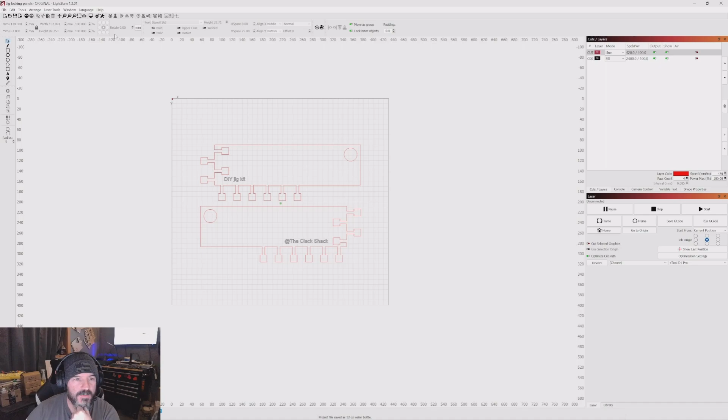So now whatever you stick on the puzzle pieces here for the front for your jig, that's going to be square with the laser. So this is a really cool system. He explains it more in his website, but yeah, so there's the jig panels.

Here's the actual different panels that you can make. Right now I'm doing the large jig board. The extra large jig board won't fit, I don't have a piece of wood that big, plus it's too big of a workspace for the thing. That might work if you have the extension on your laser.

Even this large jig board was too long, so I had to open that up in Inkscape and break the path on the bottom, cut that out. So now I basically took this line out here and took it out. So mine's just going up, over, down, up, over, down like that and cutting. It's not cutting its bottom line because my workspace actually stops right about here where this blue line is. So I don't even need the bottom piece. I don't care because there's nothing to cut out, so it doesn't matter.

So what we're going to do, I'll explain it when we get over there, but when this piece of wood gets cut, it sticks into the back piece like a puzzle. So we've got the jig, this piece of wood. Here's how you make a custom jig: you just take this blank piece, and whatever you cut out while it's affixed to the back piece that's in place, you can use absolute coordinates over here, and it will automatically go to where that is on the laser.

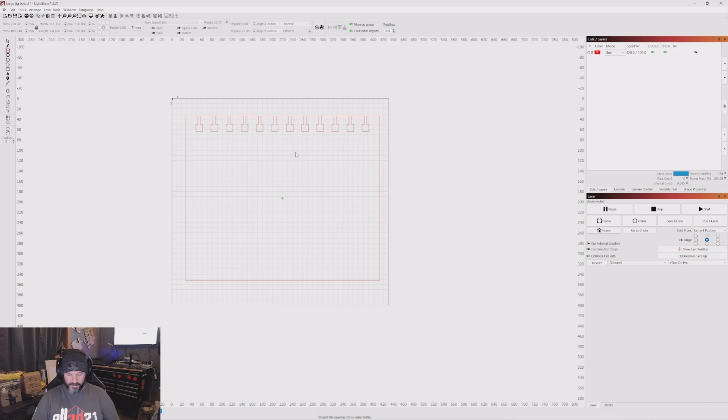So we are 95, 96, 97, 98. I'm going to cut my holes at 99. I'll give a millimeter of breathing room, because I found that if I cut it exactly to this size, it doesn't always work right, and when you stick it in you have to force it in. So I'll give it a little bit of play, just a millimeter though, not much. So what I said, 99, right?

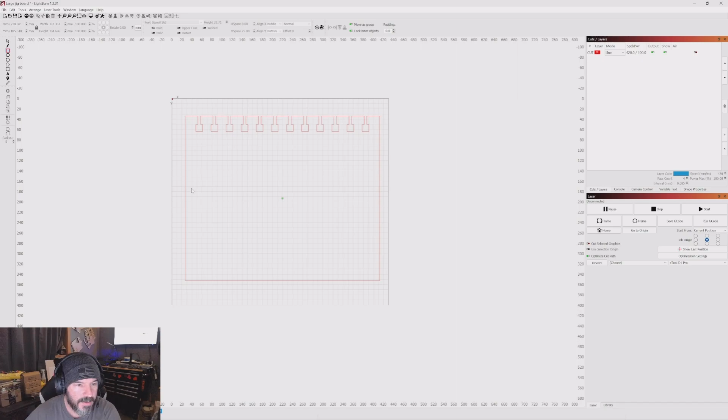So we're going to make a square, and I'm going to use the blue T2. The laser will not cut T1 and T2, those are tool lines. As you see up here it says tool, it'll frame them so you can see them, but notice up here there's no output, so it's not going to cut them. Let's see, we got this, we're going to... look at that, I drew a perfect square.

Isn't that cool? Well, we don't want it 100, we want it 99. All right, oh I'm a dumbass, that's the percentage, I didn't draw a perfect square. All right, 99 and 99, so there's our perfect square, that is 99 each. We're going to duplicate that.

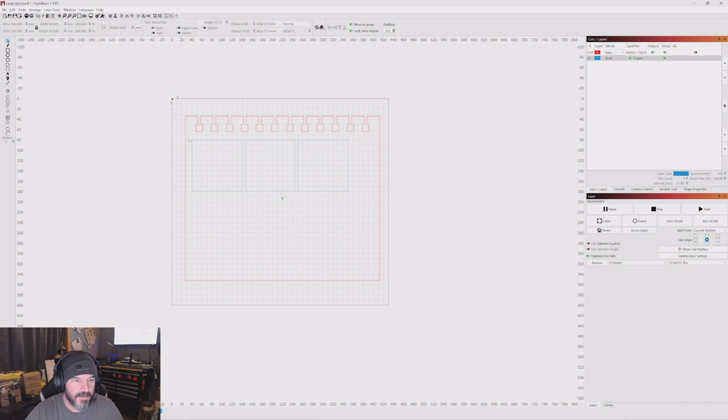Control D, move it over. Yeah, I could use the array function, but why, this is just as quick. So there we go. Now we've got some room here, right? Looks like we're going to fit 6 on here easily.

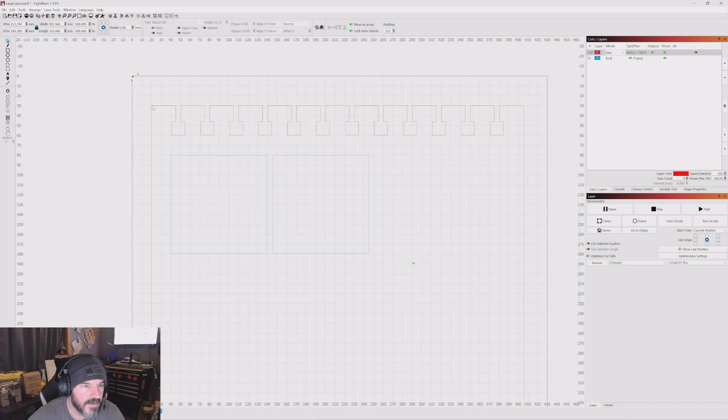So let's get that out of the way. Let's put this, this doesn't matter, you don't have to put things in line with these squares. I just do it for measuring purposes right now, because once you cut the piece it's a freestanding piece anyway, so it's irrelevant. But, where do I want to do this? Let's put this one.

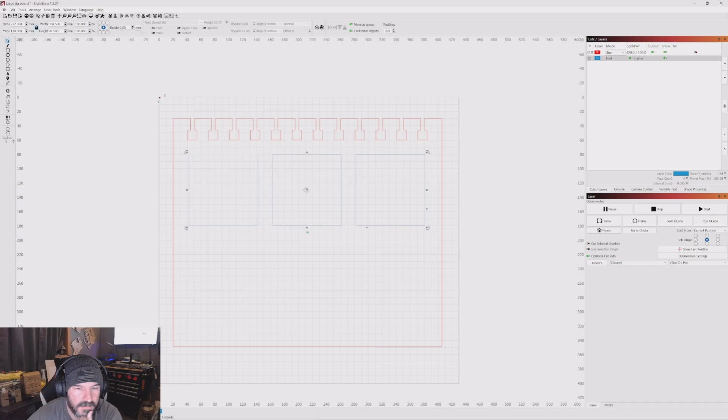Let's go over 2, and then go over 2. That leaves us 20 millimeters there and a little bit there. So we can actually move it over just a hair. Actually, I'm being retarded, I can also just group them with Control G, highlight all of them, and go up here and vertically center. There, now it's centered.

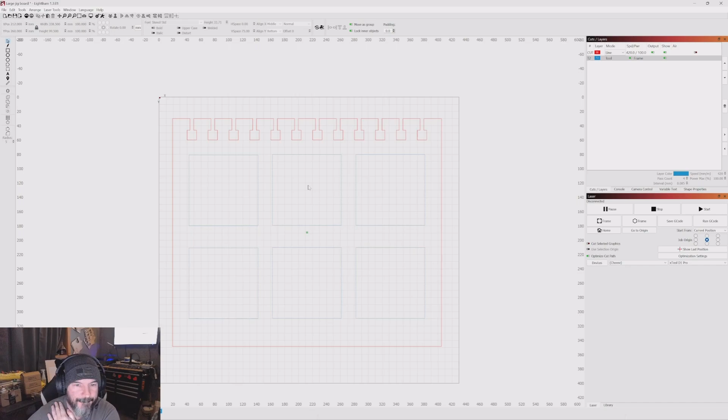Duplicate that, bring that down to the bottom, and there we go. Now we've got our 6-piece cutout. Cool.

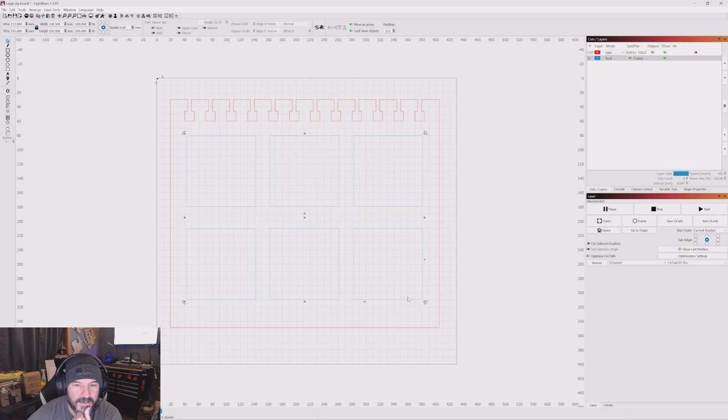All right, well we need to turn those back to cut line. And I've got 1/4 inch birch in there, so we're going to go 300 speed, 100 power, 4 passes. That should do it, we'll see. We're going to turn this back into a tool line because we're cutting that out right now.

And yeah, this next part I've got to do over at the machine, because... actually I don't need the tool line at all. I just remembered that, let me take that out.

So what we're going to do, let me group these. All right, so what we're going to do is push these up somewhere, we don't know where yet, down here. We're going to put these somewhere and then frame it and make sure it's within the board once we push the pieces in place. Then it will be locked in and we can use the absolute zero coordinates, which change it over here, absolute coordinates right there. You notice it puts your little green dot back at home up there.

So I've noticed on my machine, if I start more than 20, here's 20 millimeters, if I go less over here and start at 10, I'll get the alarm. It'll hit the side of the machine. So the workspace on these machines, they kind of lie to us a little bit.

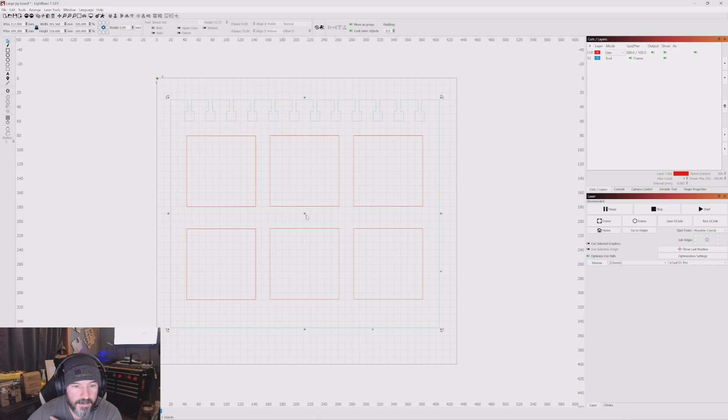Okay guys, here's take number 3 or 4 or something, I don't know. My audio cut out on me earlier in the middle of the video, so then I tried to do an overlay and I didn't have the mic turned on. So yeah, this has just been one of those days.

So real quick, we're just going to go over this—the part that cut out, I was talking about when I was creating the cutouts for the jig.

Jesus Christ, that's bright. Holy fuck. Why can't anything work right today? Let's see—settings, properties, configure video, exposure—get rid of the low light. There.

Okay, now that we're done blinding ourselves. So what I was talking about in the one spot in the video was about the cutouts—placing the pieces of the cutouts for the coasters in a certain spot, moving it up and down, getting it just right. I think there's enough redundancy in the whole video about that, so I don't think I need to bring that up again.

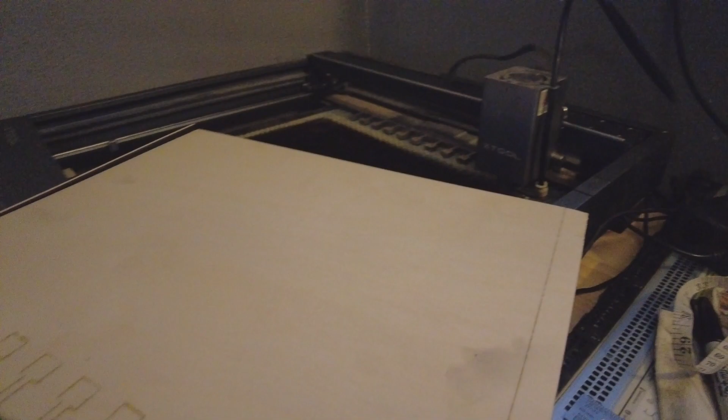I don't know if you can see, but we've got a few spots here. We're going to have to hit it with the knife. Especially down here, there were some glue pockets down there. The rest of it came out pretty good. I mean, it's almost loose. Honestly, I could probably... yeah, most of these I can poke right out with my hand.

So we got very minimal cutting to do. All these are loose, very minimal cleanup. I think, honestly, the only piece I'll have to score looks like maybe right here. Can't seem to get that to poke through one-handed anyway. Maybe if I put you guys down, I can do it.

Got that one. But this over here looks to be pretty... oh, got it. We ain't got to be pretty. I don't care if it rips some of these little fibers off, because this is just a jig anyway. Alright, well, let me put y'all down and go ahead and pop the rest of this out. Maybe.

Alright, let me score that piece real quick. As long as you come most of the way through, you don't really have to cut at it too hard. Just give it a little score and it'll come right out. It's just a couple little strands, little fibers holding it in.

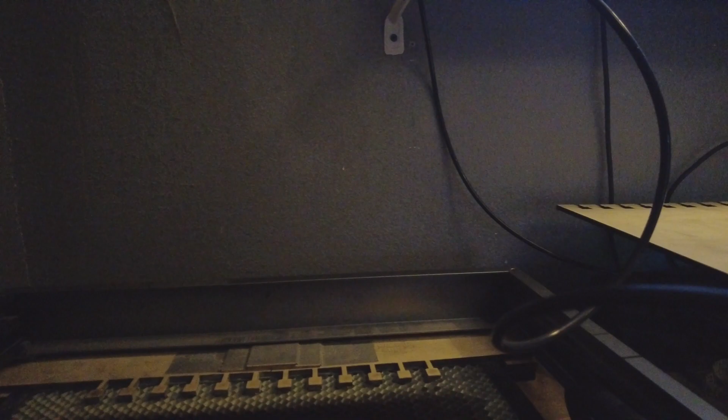Get up there. Little bendable tripod is not cooperating.

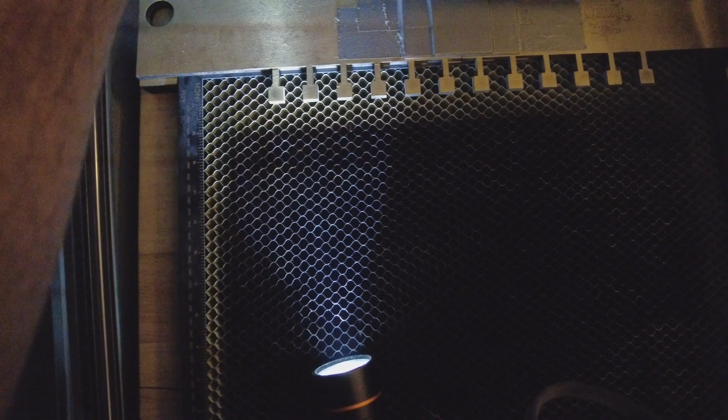Alright, so there's the back, and you'll see I've got that back piece already in place. If I lift up on my frame, you're gonna see—hold on a minute. If I lift up on the back piece, you're gonna see the holes where the legs go in, right? So the legs rest right inside there, on top of those little honeycomb adapters I was talking about.

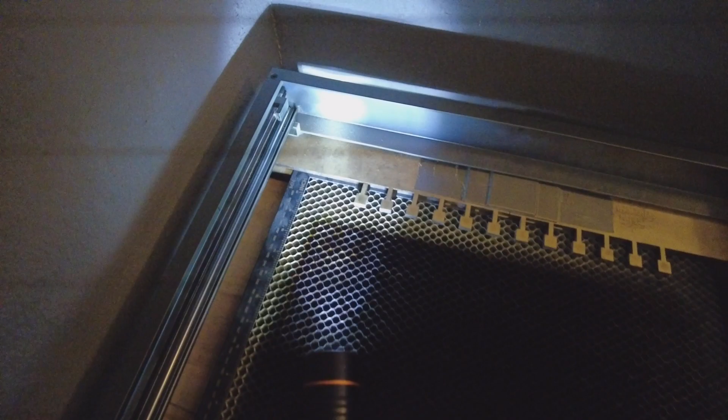And this stupid thing ain't... What are you trying to track on? Dumbass camera. Alright, so we've got the holes back there. They sit in there. This piece stays.

This light's a piece of shit. Put that over there. Bring out this LED light, see if this is a little better for what we're doing here.

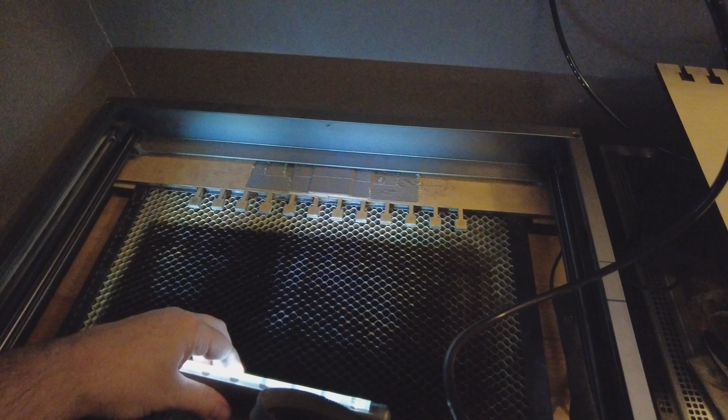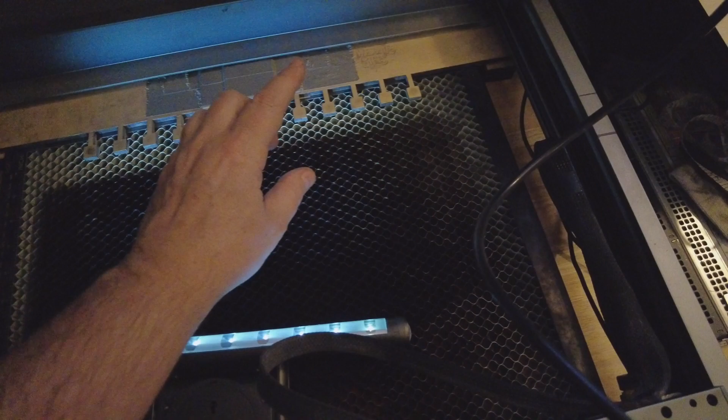Okay, so this piece, it's got a little bit of play in it, right? Up and down, but no play left and right. There is, I'm not gonna lie, about a half or a quarter of a millimeter of play in it, because when I sanded the inside of the circles for the legs, I went a little too much. But it doesn't really affect anything—there's just a little bit of play back and forth because of my sanding job.

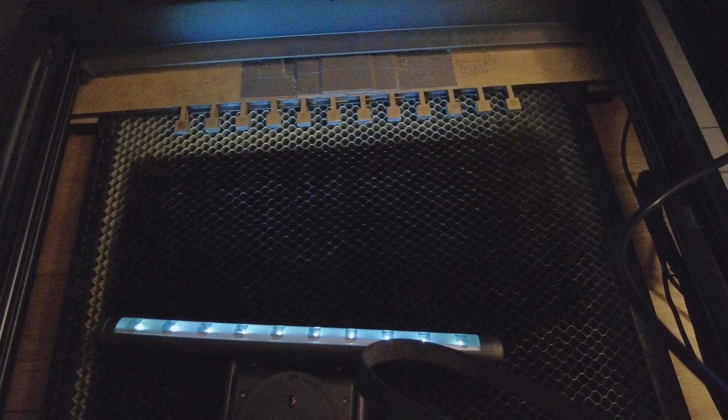So I've got someone in the group that's going to try to make us a metal one of those back plates. That'll be great whenever that happens.

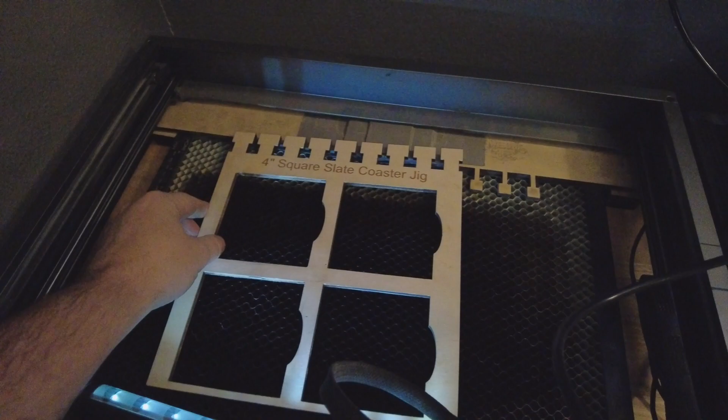So whatever jigs you use, you see I've got a bunch up here on the wall. They all have the little puzzle pieces at the top. So if I were doing this one, this is for slate, and I just stick them right in there, and it fits right in. Then I tell the machine to go home, back in that corner. I hit start, it comes right out to here. So it's pretty cool.

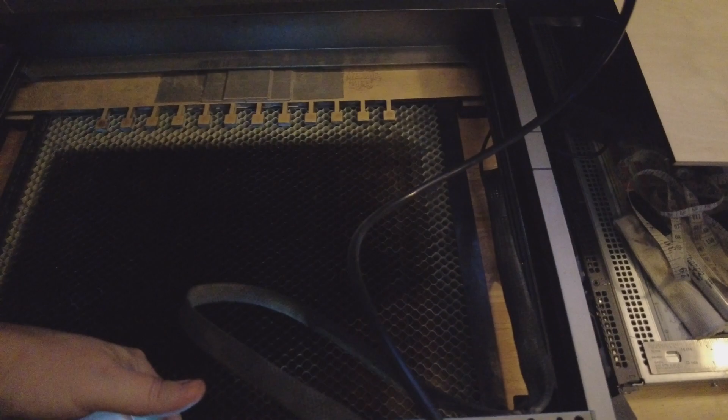But I made that one the same way I'm making this one, so let's get started on that. We take this big old piece of board that we just done, and let's see how tight she's gonna be. Hey, it's not really that bad, it started to go in. She's a little tight—let me put you down.

Like I said, these first few times you put these in and out, you're gonna have to work with it a little bit because it's pretty tight.

All right, we need some sanding done on that, looks like. Cool. All right, I'm gonna press pause, go over those a little more with some sandpaper so we don't bore you to death, and then we'll come back with that.

Okay everybody, we're back. I ended up just tearing off little bits of 600 grit paper and hitting it to get the char off. It took a lot to get it on there, and then I held it up to the little one I made earlier to see, and it looks like somewhere in the process of exporting it to Inkscape and back into Lightburn, when I took off that bottom piece I was telling you about, it must have shrunk up like 0.5 millimeter because the little pieces right here are just a little bit short.

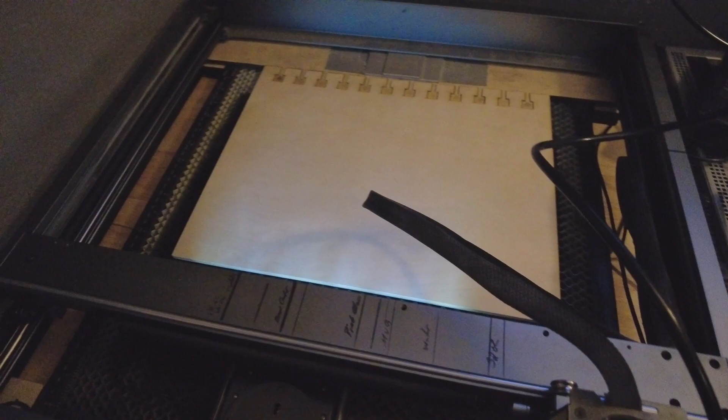So now we're gonna go over here and hit the home button. Oh, my light's in the way, I'll just push it with my hand. There we go. Now we'll hit the home button so I don't run into my light. So the laser went back home. It's in the back space, right?

So now we go up here and we open up that file that I made earlier. Jigs, there you are. Okay, so we don't need the blue part anymore, let me get rid of that. But this is our layout and this is what we want.

So if I move this all the way up here, remember I told you earlier I can't go 20 or I'll set my alarm off. So we'll zoom in, we'll grab it here, and we'll drop it right there at 20, 0.

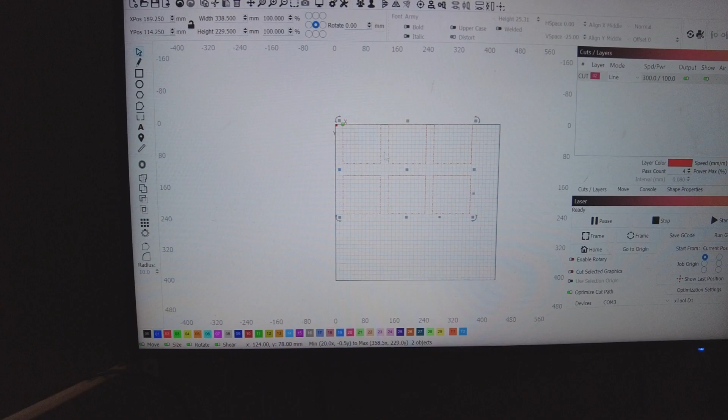And let's just do a frame. Actually, let's ungroup this. Control U to ungroup. And make sure this one's ungrouped. Control U. What I want to do, I don't want to frame the whole thing yet.

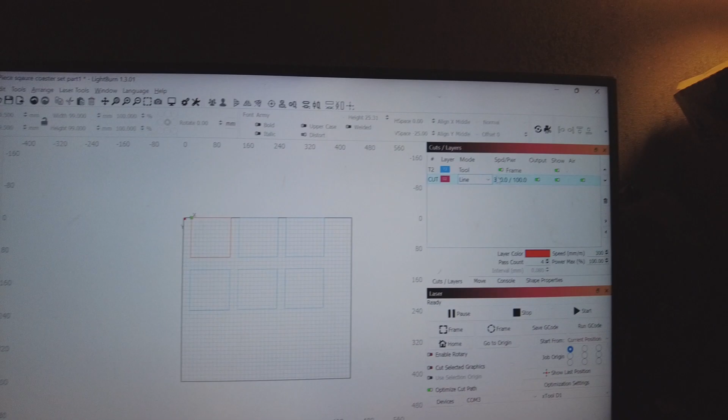Stupid camera, stay up there. I don't want to frame the whole thing yet just because I don't want to sit here all day doing that, so we'll just make those a frame. We'll turn this one back to red, and up here we turn off the frame button for the blue. So now when I hit frame, it's only going to go around the red one.

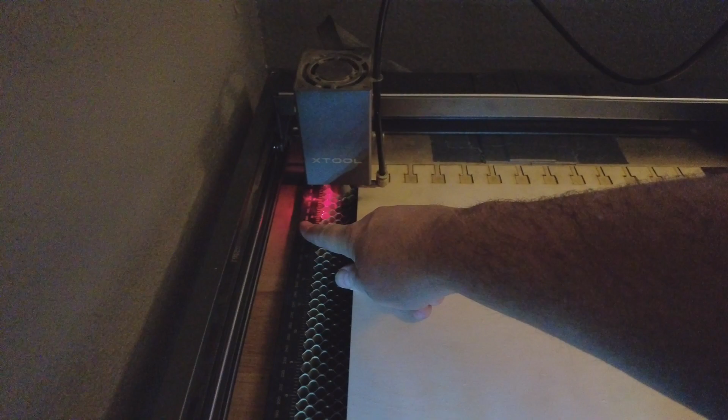And basically what I want to do when I frame it, I want to see where it puts it on the board. Alright, and way off, right? But that's about right, because remember I told you 20 is my limit before it starts to bang into the rails, so I know that. So now we know that's over.

We'll get our little slide rule and measure from crosshairs over. It's about, can't see, 35. And we know we want to come in about, what, I'd say 10, 20. So let's just go at 55 for now and see if my quick math is right.

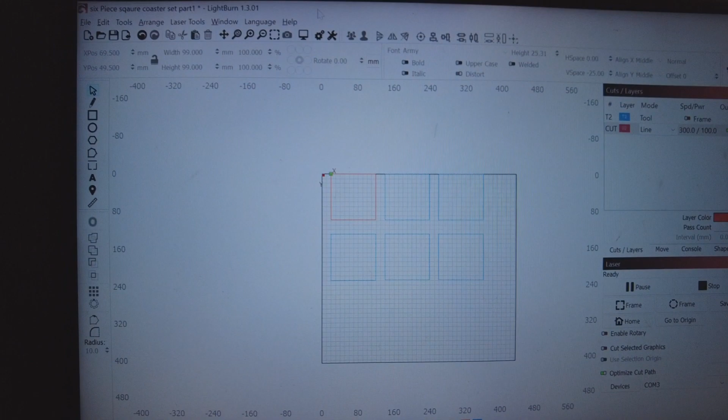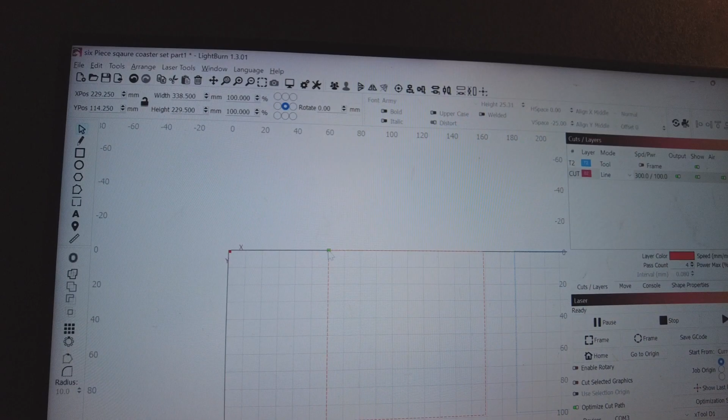So we highlight them all and move them over to about 55 from the 20, so 75 total. So 10, 20, 30, 40, 50, 60, 75-ish. That seems a bit far. I bet I can get away with right here. Let's go right here. Let's see what that does.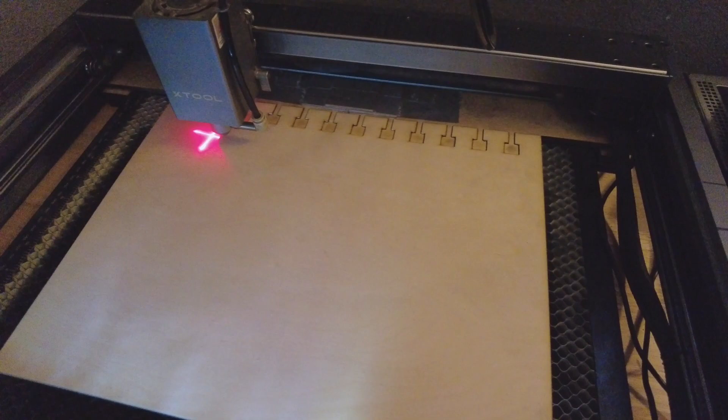I'm stupid, I didn't change this over here from current position to absolute coordinates. So now we do that, hit home, tell it it's home. Now we hit frame, and we see it goes right there. Alright, that looked about right.

So let's see how far over we're going to be. About 25, so I can go back 5. I thought that looked a little far. I did my quick math too far ahead.

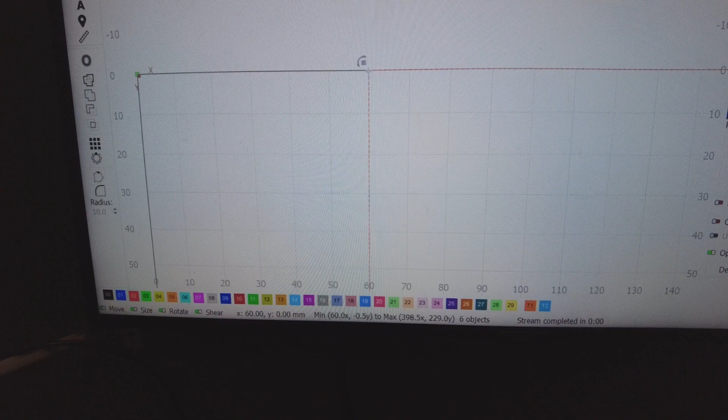Yep, I like that, I like that position. So that makes me happy.

Now we know that's 0,0, and also at the very top, right? Now sometimes this back cable can get in the way, so I don't want it that close to the top. So I'm not sure how far down we can come yet.

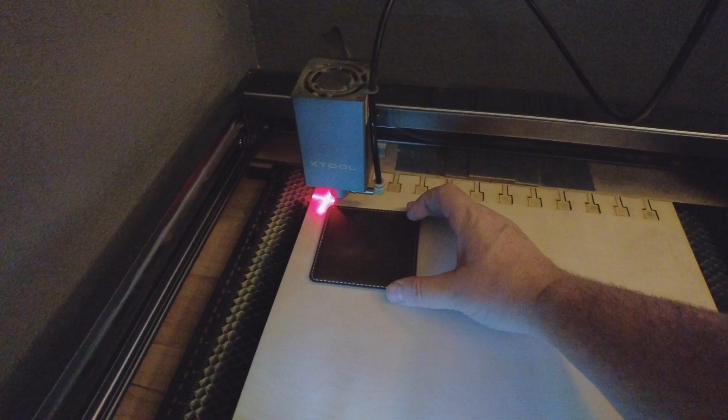Just to get a rough idea, we can throw a coaster down. See, there's 1, 2. So we got about 20, 30 millimeters to play with.

So I'm going to bring the whole thing down, to about, we'll do 30. See how that looks. And actually, I'll go ahead and close the gap here just to make sure we have enough room.

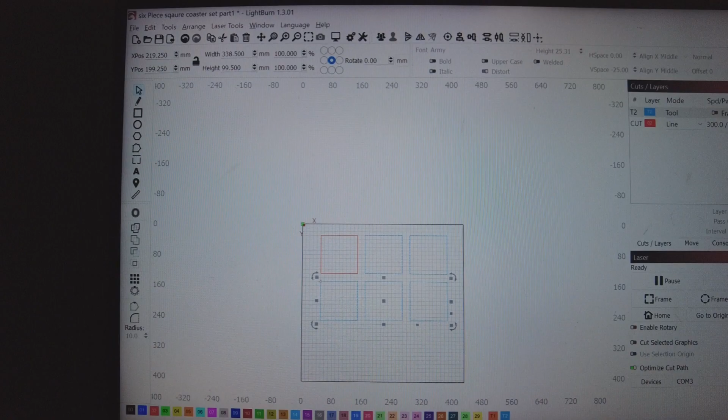We'll put it 20 away from it. Right there. Okay, so I'm kind of liking the way this is shaping up. We'll turn them all back to red.

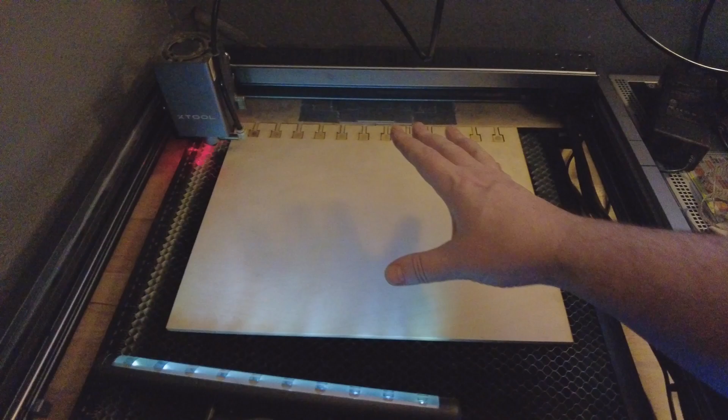And we'll tell it to go home. Always hit home and then start again. Sometimes I've noticed, now it's supposed to, if it's out here and you do something, it's supposed to go right to it. Every now and then it gets stupid and forgets, I think, or I don't know what it is. Or maybe I do something wrong, I just don't know it.

So now I've just gotten the habit of always hitting home when I'm using absolute coordinates. So we'll frame the whole job. We'll see it's going to start up there. That's cool, gives me some room. I can write something up here.

And we're probably going to go to about here. Yep, probably going to come down to about here. Oh, look at that, we're right on the bottom.

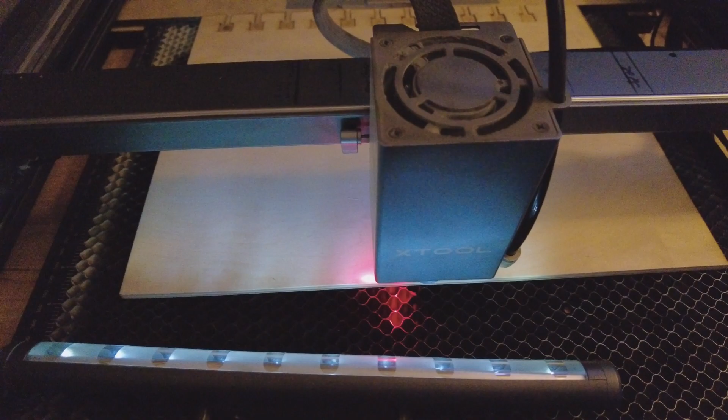My sheet of plywood that I chose doesn't cover the full workspace. So we need to go up a little bit.

I kind of want to keep this gap here, I don't have a whole lot of room to work with. Screw it, we'll just make them 10 millimeters apart. That's fine, so that'll buy us 10 millimeters, and do this.

We'll go up. Now again, remember guys, this is also one of those things that you only have to do once. So take your time, even though it's a little annoying, a little time consuming. Take your time, get it set up exactly like you want it, because once this is done, anytime I want to do these kinds of coasters again, it's already set.

I just plop that thing down and pop the coasters in and go. So, alright, let's go home and let's frame that again. See how far on the bottom we come this time.

Oh yeah, we got lots of room now. We made a lot of room. So I'm happy. I just don't like my stuff all the way on the edge and the bottom if it doesn't have to be.

I can actually bring that back down 5 millimeters. I think I might do that because that was kind of a lot of room. I just don't like the inside pieces being so close in case I break it one day. I mean, it's plywood, it shouldn't break, but again, it's one of those things, personal preference. I just like it to be a little bit spaced out.

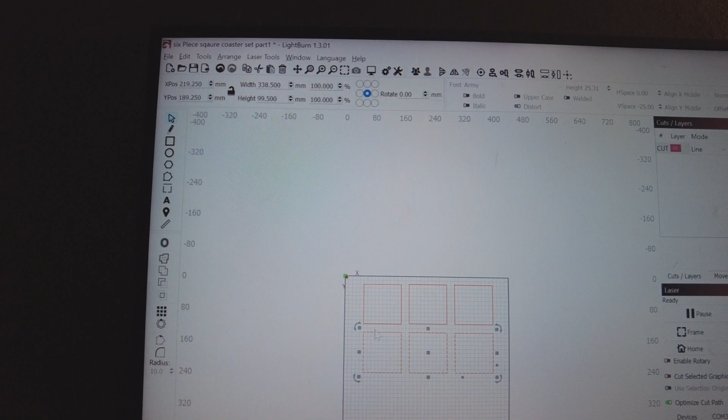So let's go ahead, and I need a camera that attaches to my head. Then I don't have to hold this hand. At least it's got a gimbal on it, so it's nice and steady for you guys.

Okay, so there's those pieces.

I don't think y'all want to watch it cut, do you? I mean, I could leave the camera on and do the time-lapse nonsense, but engraving's funner to watch time-lapse, not really cutting.

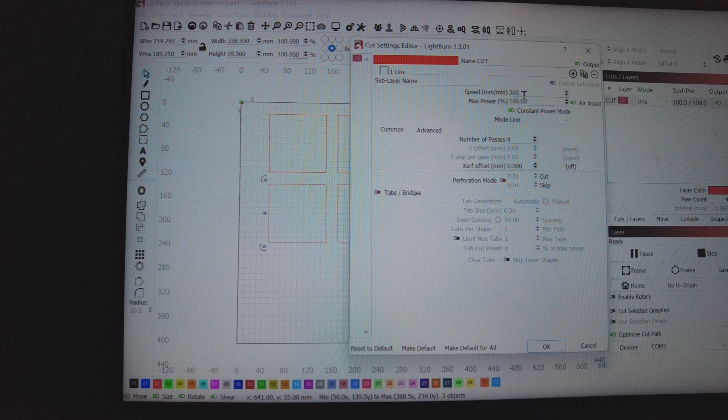So what I'm going to do now, the other one I did at 300 at 4, it left a little bit of scraggles. So I'm going to do this at 275 at 100 power, 4 passes. And we'll see, those should pop right out at that speed and power. It's going to take about 34 minutes, so I'm not going to leave this thing running. I'll go charge it while we're waiting.

So what we're going to do, now we're going to cut these. And then once we cut them, we're going to turn them back into tool lines, and we're going to lock them in place. And I'll show you that, and then I'll explain to you why, because that's when, right now it's our cut file, right?

As soon as we're done, because of the relationship between this absolute zero coordinates and the way the template's stuck on the back piece, it's all going to equal itself. So when these holes are here, as long as we save this file and lock those in place, next time all we have to do is drag our images inside these squares, and boom, we have a template.

So I'm gonna go ahead and get this started. Let me turn my air on, and we are going to cut. There it goes. So I'm gonna pause the video, and we will be back, and we'll have our pieces all cut out.

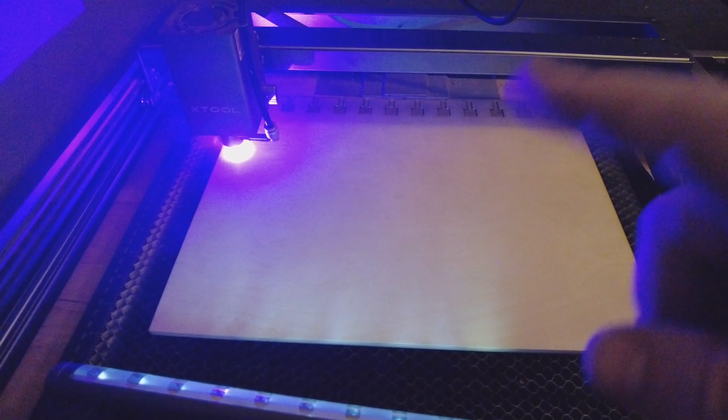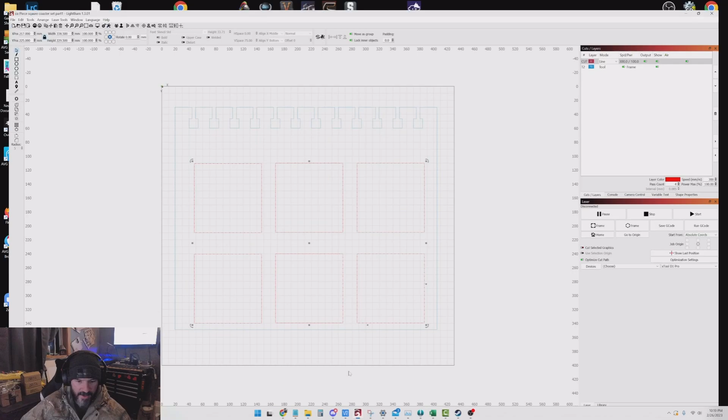All right boys and girls, I thought about it after I stopped the video over there. We can do this part on the computer to save a little bit of time while those are still cutting out the template for the jig. We can go ahead and set up our template. So let's reopen that file. And there's the one that I just had over on the other computer.

As you can see, there's our six lines. So the first thing we're going to do is turn those into tool lines, because we don't want to cut those anymore, right? So now they're tool lines, and nothing will happen with them, but they're still visible to us, so we can see where the squares are in relation to the board.

Now if we highlight all of them and go to Arrange, then Lock Selected Shapes, you'll notice little plus signs come in all the corners. Now if you click them, you can't do anything with them, you can't move them. So they're locked in place, and now we don't ever have to worry about dragging them out of alignment.

I don't know if I'm explaining this good or not, maybe I am and I'm just overthinking it. But since we start at 0,0, we utilize absolute coordinates. We hit home on the laser, and the laser always starts from here and goes over here to do whatever we drop inside there.

So let's put a picture in there. Oops, not that button. Yeah, I'm wearing my jacket because it's cold in here, I opened the window and it's like 15 degrees outside.

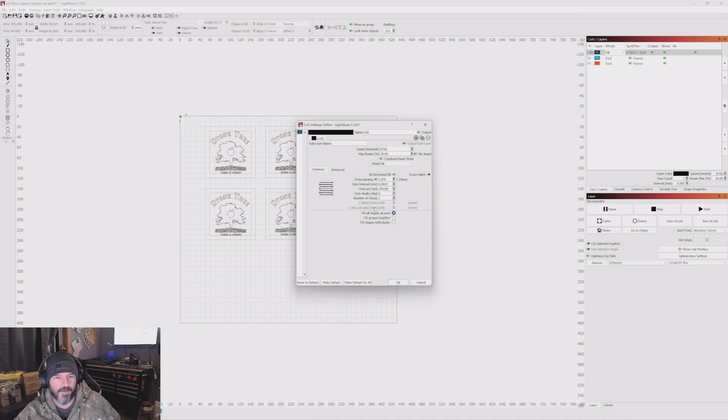But just go here, fill groups together, and that makes more logical sense—basically it does one at a time. And now if we go look, we see there's no dark red. The dark red was it overlapping itself, doing redundant work. The light pink is where it goes. In the first scenario, we had a lot of light pink in between, right? Because the laser was going over there. Now you only got it going over once—so it does all this, goes over, does all this, goes over there, right? And that's why it cuts off a lot of time, 15 minutes worth of unnecessary movement.

And this, again, is 8700 speed, so that's pretty fast—that's 145 for those of you that use millimeters a second. So that's pretty quick. I wonder, I probably could push it faster, but honestly, I think if you get going too fast, you might lose a little bit of the detail, so I don't want to mess with that.

But so I'm happy with this. This is what we're going to set, this is what we're going to do. Let me save this as the final version, and then we'll go over there and watch one.

We will do this as leatherette square coaster set—that'll be the name of that.

Now also what I'm going to do, just for the first one, I'm going to highlight these other 5 and give them a tool color for now so that it doesn't do them. I don't want to frame my tools, and I just want to do one. I want to do one, make sure it's going to work, make sure my jig is set up correctly and I didn't miss anything, because I'm not perfect. I screw things up. So I want to just make sure it works before I go run a whole job of 6 and possibly waste 6 coasters and ruin 45 minutes of my life.

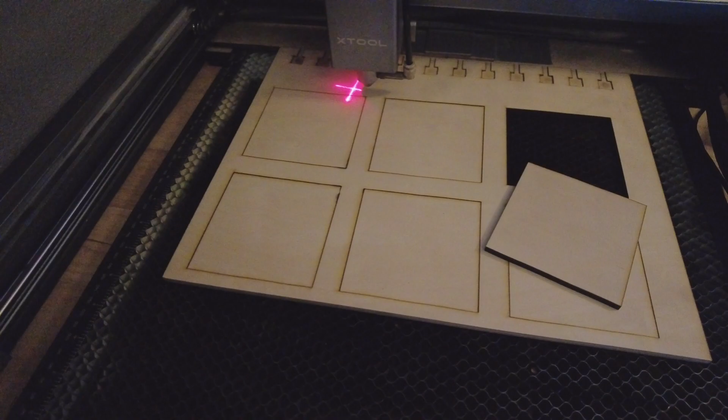I try not to sound like too much of an asshole when I talk about this stuff, but you see it all the time. If I flip this piece over, you're going to see a lot of lines didn't even go through, right? If I lift up a little bit here, this one's almost out. This one, a little bit there, it's stuck here. This one, a little bit over here, it's stuck in this corner. This one, stuck in this corner. And this one, stuck in this corner.

So if we look close, you can see some heavy burn marks here. That's telling me there's some real heavy glue deposits in this area right here. Same thing over here, there's some heavy glue here. When I run my hand under, I can feel a little bit of jagged there, so it went through, but over here there's nothing. It didn't even come through at all. So I'm not even going to waste time undoing it and flipping it over and trying to score it, because I know that's going to be a perfectly clean piece of plywood.

Now, the reason I show you guys this, look, this one came out perfect, right? Minimal charring here. Came out great, I didn't have to force that one out at all, it just came right out. So plywood is very inconsistent, especially when you're doing a big piece. This was more evident at Christmas time when we were all trying to do ornaments, right? One big sheet, let's make 20 ornaments. They don't come out. I can't tell you how many I've thrown away.

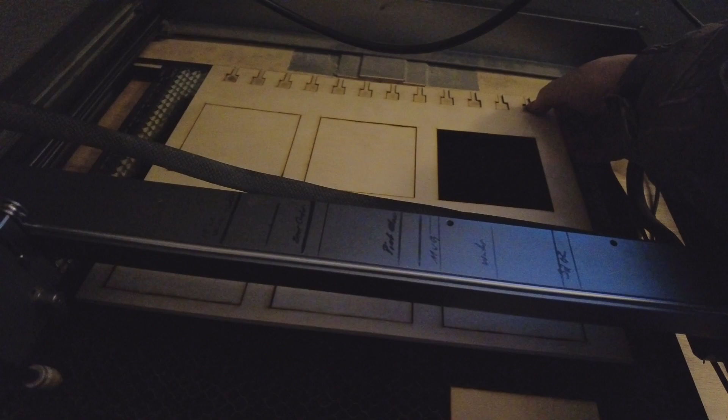Now she's still a little tight, so I'm going to bang them with the Sharpie edge here. There. Just to remind you, that is not normal, we don't normally have to do that. That's because I screwed up when I cut this big piece, and I didn't want to waste another piece of wood and cut a new big piece, but somehow I made these little deals shorter than they're supposed to be, so I got to get in there with a file and fix that up. But for now, we got it to work.

So if we look on the back, there's a big glue spot there, a little one there, a little one over here. So it's not as bad. This whole area kind of sucks, so we'll just hit that with the knife and get it out of there.

Did I tell you that I hate plywood? When I first started doing this, and this happened, I was trying to score a piece of wood out when I was out in the other room before I moved into this room, and I went down and cut my finger, big old gash right there, and it was a mess.

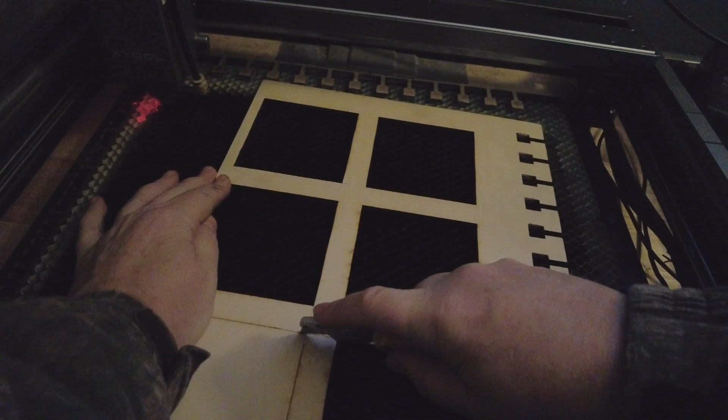And do be careful, I'm putting a lot of pressure on here, and that's why you notice I keep my hand out of the damn way. Because I already learned once, cutting the shit out of my finger, so I put a lot of pressure.

And you see there's one spot right here where it keeps popping out with this black soot. My knife keeps getting stuck in there. This is a DeWalt blade, these are nice, and this has actually got the extra heavy duty blades in there too. That's some strong gunk they put in this plywood.

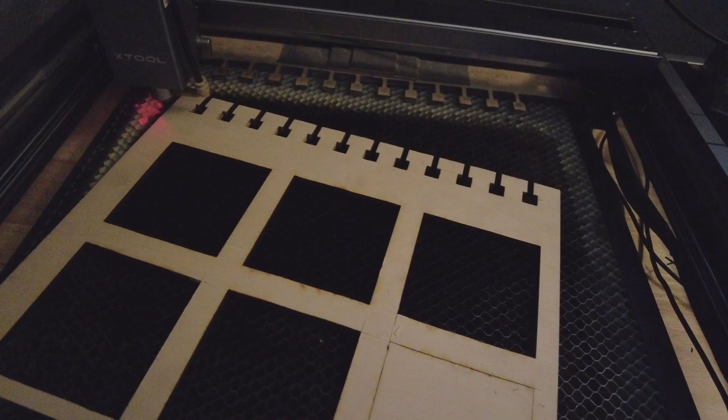Tell you what, and sometimes what happens is when the laser hits it, it don't burn it up, it just petrifies it. It makes it harder, and every time the laser goes over it, it just makes it harder and harder. Let me take off my jacket, it's warm now.

As soon as I shut my window, it gets warm quick in here. Alright, and we are free and clear. Now we got extra little pieces of wood to use as shims, right? We'll save those, we'll use them for something.

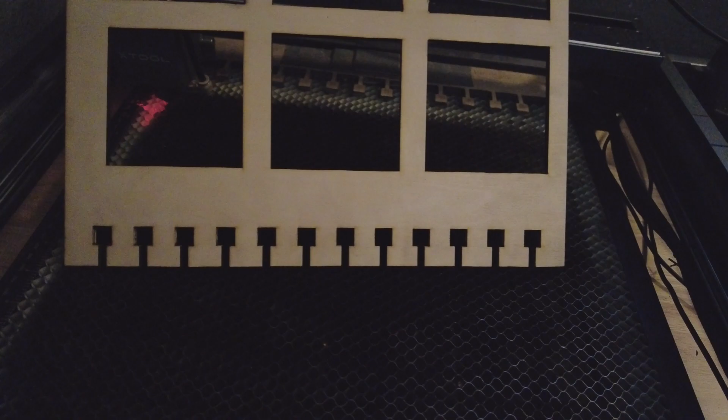And let's clean up this part. Like I said, luckily the cleanup part ain't too bad, and if you're doing a project and you need your pieces to look nice, then this can be also very frustrating, because now instead of having that nice clean black burn mark, you got really bright marks in between. So that can be sucky when you're trying to present something nice to your friends or family or customer or whatever.

Let's get some of these smoothed out here a little bit. I just want to make sure nothing's hanging for the coasters to get caught on.

Kind of running out of idle chit chat now. I think I've already displayed my anger for plywood enough, you probably don't want to hear that anymore. So we'll just finish this up.

I ain't doing 100 coasters one at a time, I'll tell you that. Alright, let's get this bad boy back in there.

Again, this is not normal. Don't sit there and go, that jig system sucks. It's a great system, all my other little pieces go in and out with ease. I just cut this one incorrectly, so it's my fault.

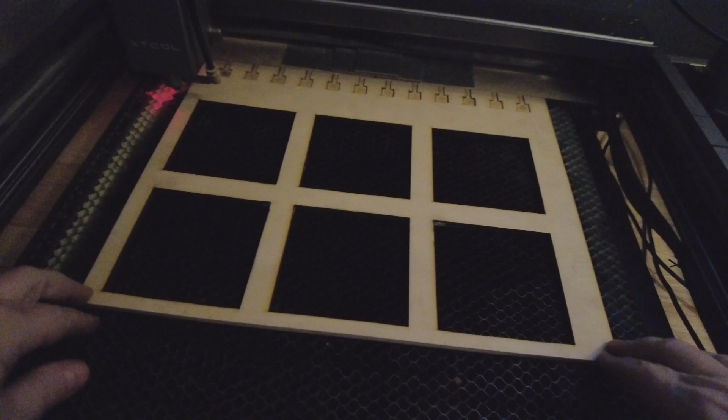Sometimes your pieces will lift up a little bit, they might warp in time. Wood warps, and you can see when I tap it, there's a little movement. So normally I'll just stick a magnet over there, hold it down. That one ain't really moving, but we just put a little magnet over there, hold her down. Doesn't matter on this because it's a jig, but there you go.

Hit home. Alright, let me take you back up here to the computer and turn the little deal. Wait, don't go that way.

Okay, so if you remember earlier, what I had done was I set all the other ones to tool lines, and I just want to do one coaster, right? So we want to try one out. Let's go ahead and plop one in here. I'm going to push it left and push it up. There really is no play in here. I just do this to make sure, that way everything is always the same. So it's in there pretty good, there's no real wiggle room at all.

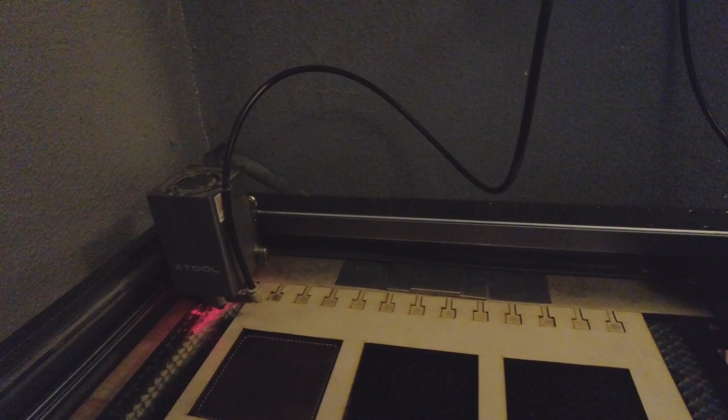So the next thing we need to do is get the focus. Put it right in the middle, drop her down, and we're good. Okay, and we hit the home button. And let me stick you guys back up here.

These little tripods with the movable legs are pretty cool. This camera likes to lock in on things, so it's not always straight, but whatever. Alright.

There's that, and did that clear okay? Sometimes this won't clear, and you might bang on it if it's too low. That's one of the bad things about using a 1/4 inch, but I think it cleared just fine. Let's just pull it here and make sure. Hit home. Yeah, we didn't bang on it.

Okay, cool. So we're going to turn on our air, and we're going to run this job. I'll leave this one running just for shits and giggles, and I'll practice with the fast forward on the editing when we edit the video later. But let's see how it does.

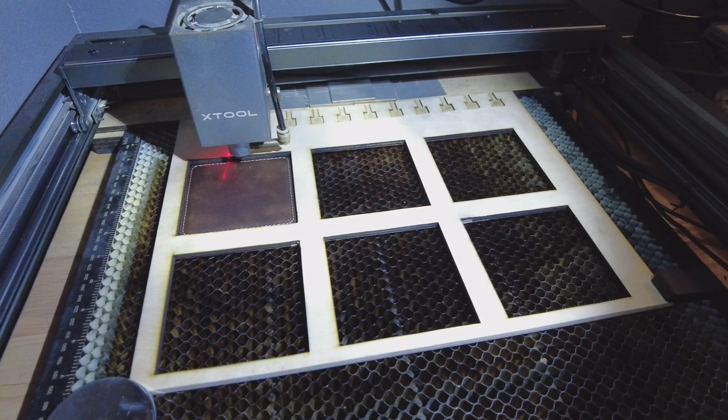Actually, I want to frame it first. About 5 millimeters away from the line on that side. Perfect, I like it. So, if you...

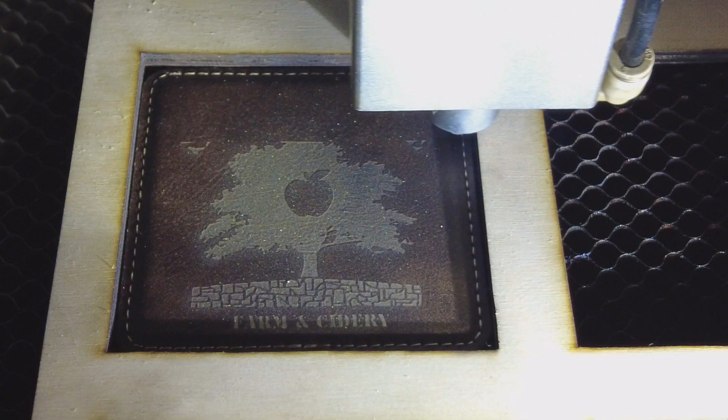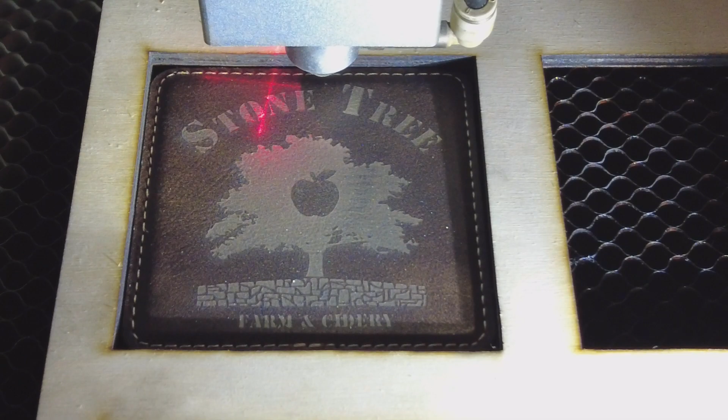It's done and looks good. Let me turn off the air. I am happy with that.

So you've heard me sit here and cuss plywood, make mistakes along the way with my cutting this I gotta fix later, struggle a little bit, but that to me makes it all worth it when you turn out something nice. Now once we get all 6 pieces in there and run it, then it's, you know, it's gold. I don't have to sit here and do them one at a time, so that's great.

Let's go ahead and get this guy out of here. And if you notice, I'm going to clean it in a second, we'll see if that cleans away. Come on, camera. Alright, we'll see if that cleans away, but there's a little bit of brown right there. It could be that the thing's bowed, I don't know that it is.

So if the coaster was bowed at all, it could be losing focus there. With these leatherette pieces that have the foil inside to get other colors like silver and gold, if you lose focus a tiny bit, it can make it, you know, not as shiny.

So what we're going to do here is another little trick. I did make another little video a while ago about cleaning the leatherette with tape. But since then, I have seen a video from the people at JDS. Where is... Oh, I went too far. So I saw a video from the people at JDS, and they said it's okay to use liquid on these things, so we're going to go ahead and do that. What they did, they said just get you some good old LA Awesome that most of us have by now, right? Microfiber cloth.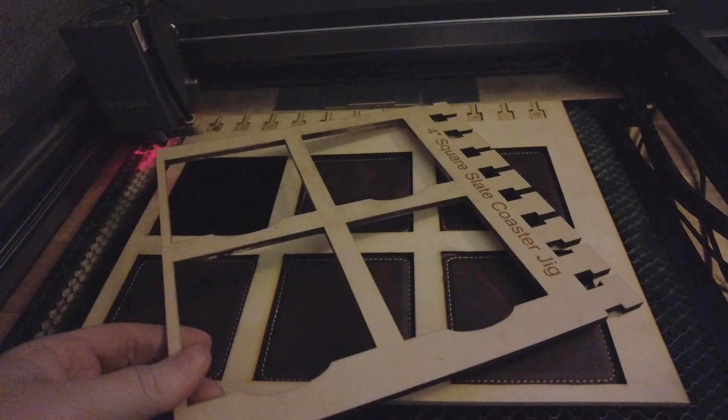This one that I already made is a 4-inch coaster set. So if I put this in there, you notice it's big. It's bigger, so there would be a lot of play in there, and it wouldn't always be centered. So that's the other reason why I wanted to do one specifically for these coasters, because they're fractions of millimeters smaller.

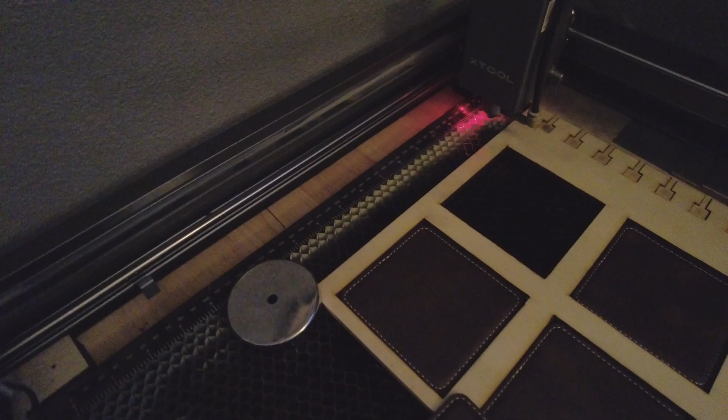I was about to do another run, and I wanted to show you this first. So, let's hook you here, bend you that way, spin you around.

Alright, so first we've got a completed one here, and I wanted to show you how I do the back real quick. So we put that in. I've set up my logo on the top already, and let's go focus this because I have a different focus, and that's also what I wanted to show you. But we'll focus that real quick.

Alright, go home. And this should not take very long at all. Turn that on. It's going to take 2 minutes.

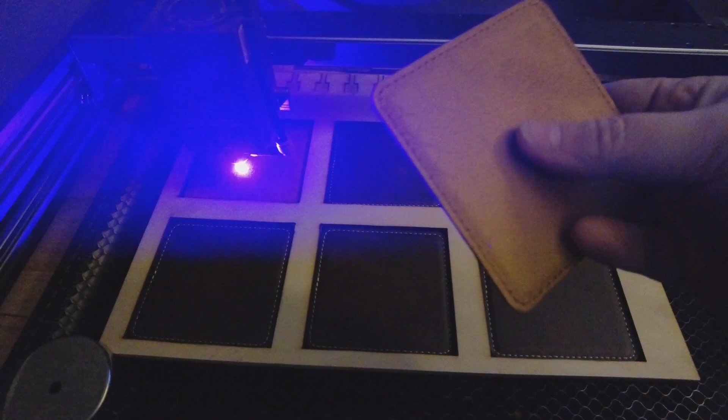So the back side of these coasters has a nice felt feel to it. It's kind of like the underside of leather, but it's more felty feeling. So it's pretty cool. And it engraves super well. It puts a really nice finish on it, I think.

Come on, little camera.

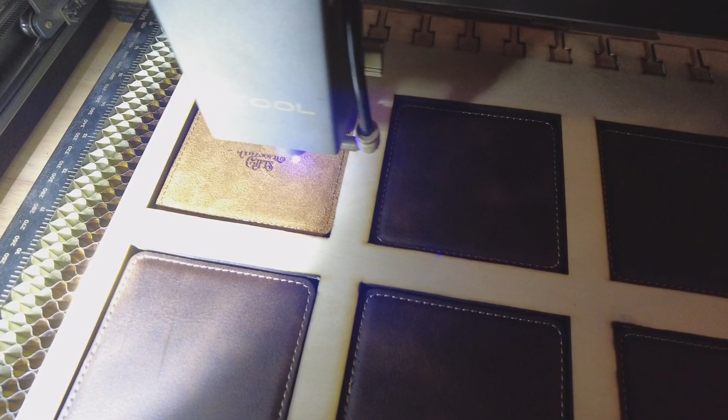Smells like you're burning a couch.

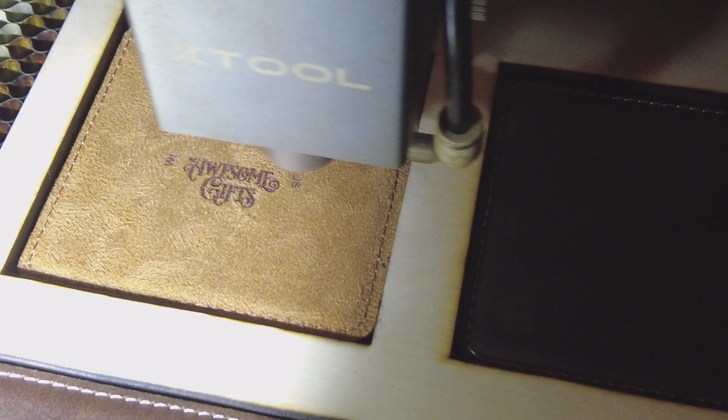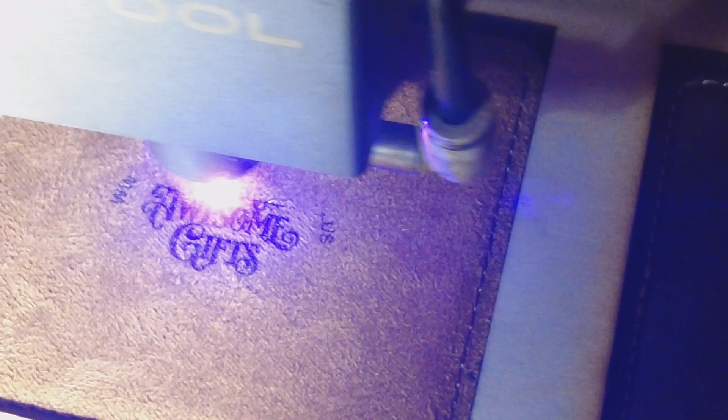I kept the same speed as we're doing the front side, because all we're doing is putting a nice little black mark in there with my business name and my website address. So the underside of every coaster will have that. It's a little bit of advertising, kind of like your maker's mark. There's a lot of different opinions on this, but I believe you want to mark everything as much as possible.

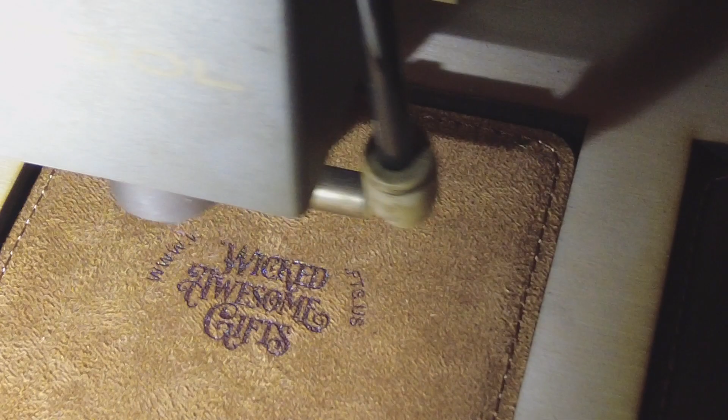A couple things I don't mark: I don't mark my glassware, I don't mark my tumblers, but I'll stick business cards inside of them instead. It doesn't look very professional if you mark those things. But these coasters come out really nice, so I don't have a problem putting my maker's mark on them.

And we're almost done. Something quick and easy. After I get them all done, I plop them down and do them all at the same time, but I just wanted to show you guys that real quick while I was thinking about it. So if we look at it, it looks pretty nice and it's burnt in there pretty good. So there you go, that's how we do the back. There's your front, there's your back, and it's a nice coaster.

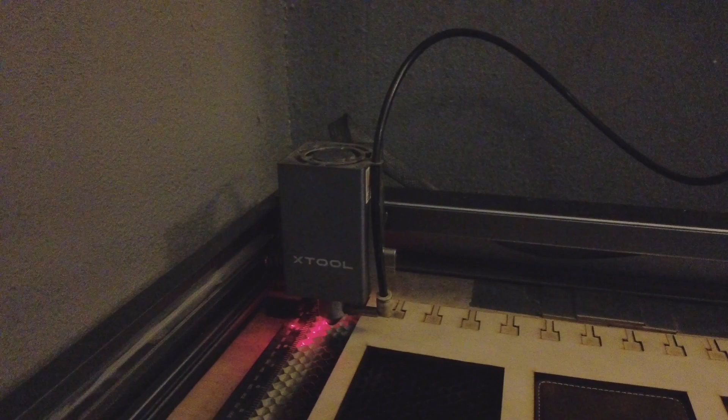So let me put you back down here. Earlier, if you remember, I got... come on camera, god damn it. Maybe I'll get a donor one time that'll say, hey, have a real camera. ...cooperate at all. Alright, zoom out. Alright, well, Jesus Christ, I ain't got time for this. Getting late, I get cranky when I get late.

Alright, so there we go. So if we remember, earlier we had our first set, and it had these little marks right here. I tried to clean them and it didn't clean well, and all 6 of them had something similar to that all over them. So the first batch, kind of yucky.

I'm gonna have to go ahead and buy another one. I don't want to give these to the customer. I hit it really hard with the towel to see if it was just black that hadn't come up, or if it had gone through the foil, and it in fact had gone through the foil. So the fact that it went through the foil tells me it wasn't a power problem. The power is good, it was a focus problem.

So the focus was too deep. When you're doing it with the basic leatherette for patches, it's not a problem. Those lay flat and you can stretch them and put them with magnets.

Okay, so today has just been a day of days apparently, probably because it's late and I'm ready for bed. But my handheld just quit on me, the memory card got full so I didn't notice. So I finished my talking and didn't get to finish the lesson of the moment. Also earlier my audio cut out, so I had to go back and talk over that one. So it's just, whew, and this video is like an hour and 40 minutes long. I'm gonna stick to 10-20 minute videos, but these last 2 have been pretty long because we're reviewing some pretty lengthy processes. So anyway, excuse me.